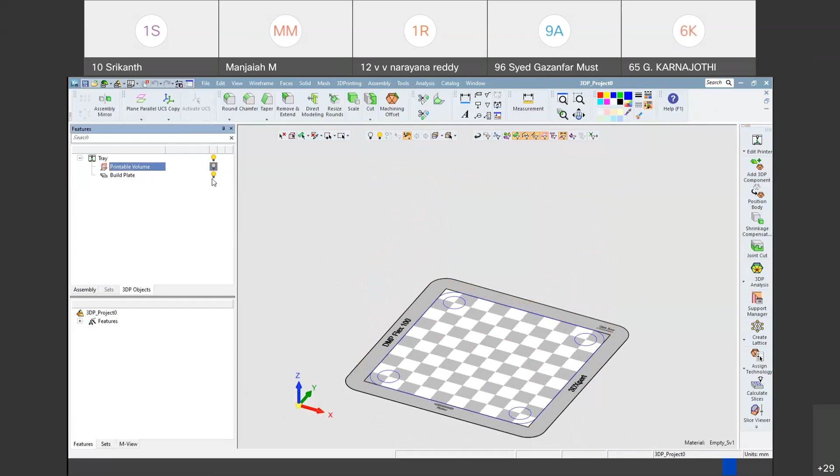DMP Flex 100—this is the machine name. So if I rotate here, this is the build volume: 100 by 100 by 80 mm. You can see the printable volume here. If I add the build plate, that blue colored contour region will disappear, and this becomes our complete area. So if I put a build plate here, this is the build plate, and this is the printable volume. DMP Flex 100 has that.

So first, let's look at edit printer—you can see edit printer is there.

So the edit printer option is there. The first step you need to do is the edit printer, and later we can add the 3D. These are some of the steps that indicate the step-by-step procedure, that is how they are arranged. So we can click on the edit printer. I will click on the edit printer. You can also add edit printer and material parameters.

I will click on the edit printer, and you can see here DMP and 3DXpert, which indicates the 3D systems software. It is actually not only for the DMP Flex 100.

Not only for the DMP Flex 100, these are the machines 3D Systems is having. So for all these systems, 3DXpert will support it. It depends on your system. Right now we are using DMP Flex 100, so we are using this one.

And this is the build plate for the DMP Flex 100. We'll fix that one.

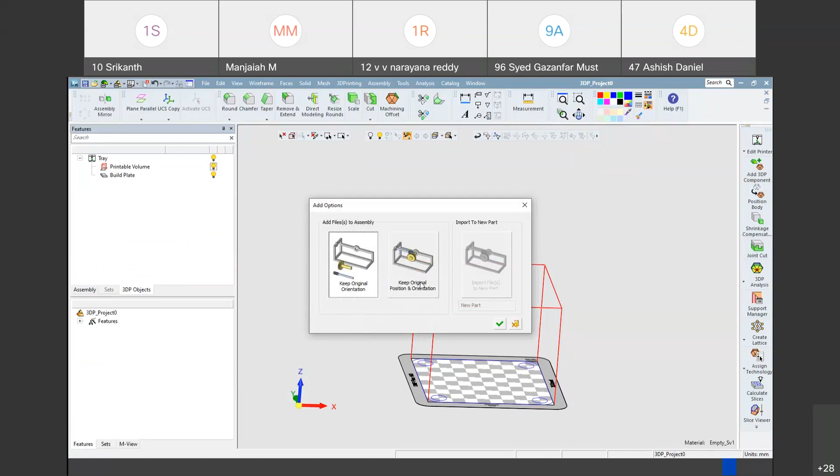It is asking keep orientation - original orientation or original position - and okay, I will keep this one default, so it will set into the default position, that is 0, 0, 0 position.

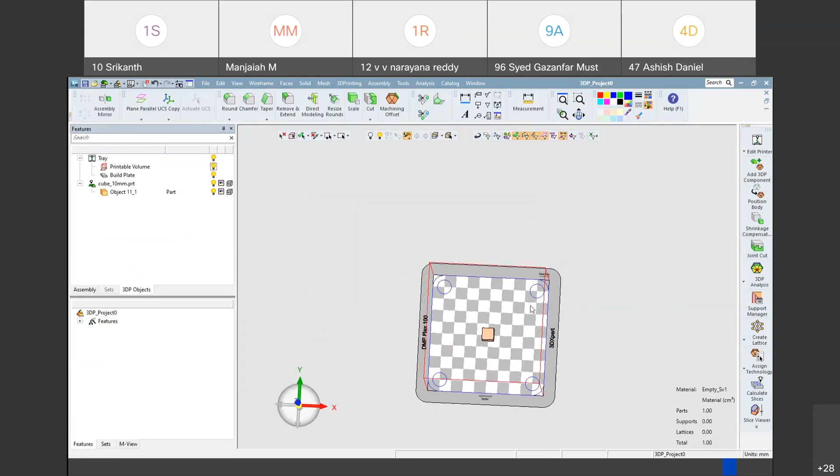So you can change your angle here like this, or otherwise you can set a control and move it. And always remember that it should be like this while importing the part - the roller should be here, and on the DMP Flex 100 this should be here.

So once we import the part, again what we need to do - if you feel this part is the smaller one, I can do the scaling.

After importing the part, you need to set the position. This is the default position, right? I don't want this position. So you can set the position, x-axis rotation, this thing, same as yesterday.

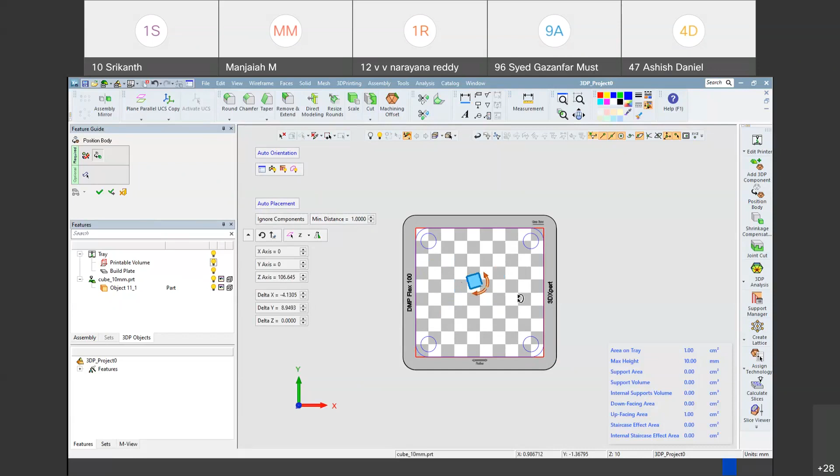I can drag my part by selecting this one and dragging it anywhere on the screen. Or I can set it - see these coordinate axes changing, right? Only the translation we are doing. Suppose if I'm doing like this, see the z-axis is changing.

Suppose this is the one - z-axis is changing, right? Suppose if I go, the x-axis is changing. If I go with this one, the y-axis is changing, right?

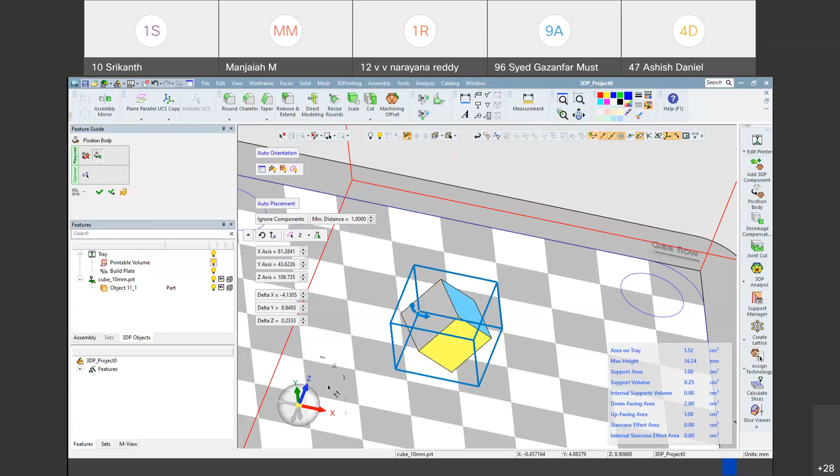So this is how you can set it. So if I feel this is the correct orientation, supports will come. So I will set it to 0, 0 default position, and I will set it to auto placement, auto orientation. It will come like this.

Anyway, these things I will set, I will tell you later. While importing the complex part, I will tell you what is the meaning of this one.

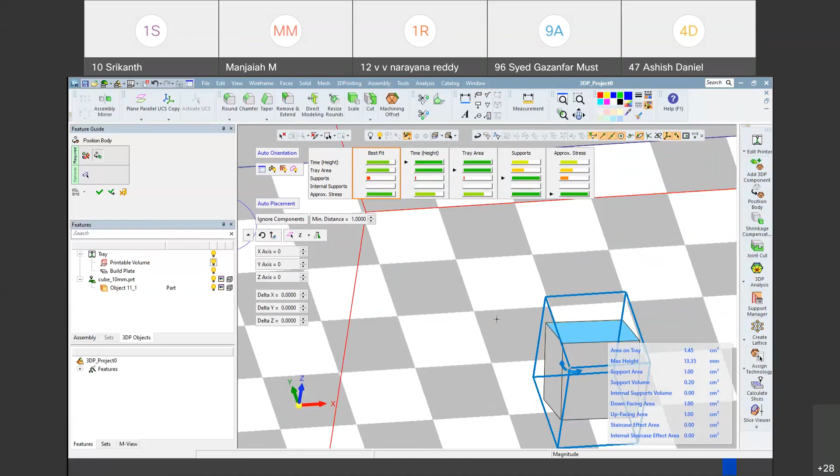Okay, so I will set it with the default position. If you are okay with that position, you can click OK.

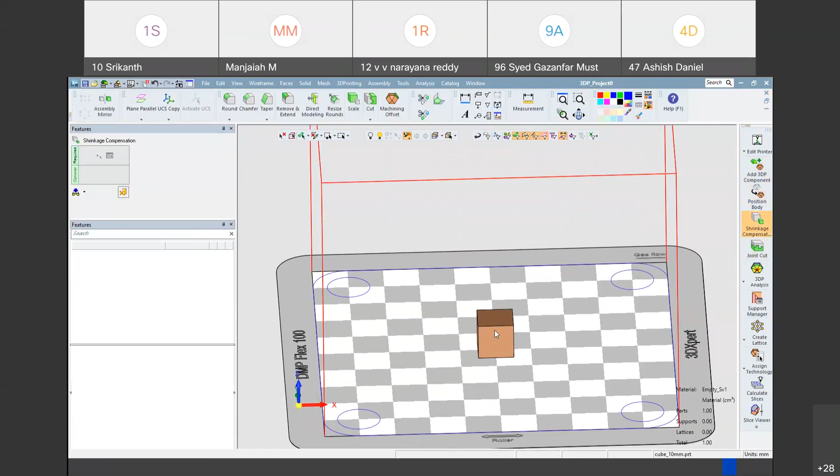So now the second step is the position after completing the add 3D printing component. That sets the position. You can go into the component if you wish. That's scaling. I will select this part, as we have only one part, so this is automatically selected. Same as non-uniform, uniform — I will go with uniform. Scaling rate, it's asking show as factor or scaling percentage, that is also there.

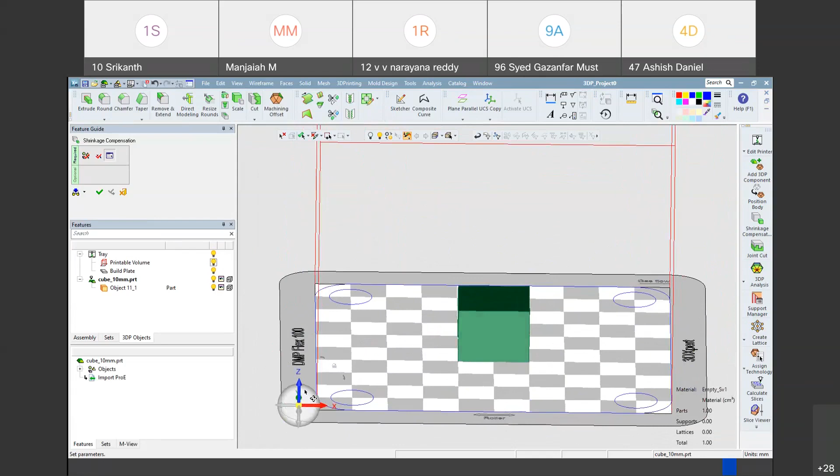So I will go with show as factor. Scaling rate I will set it to 2. See, that is increasing, right? But it is coming down — we need to set the position. So if I'm okay with that, I can click OK. Or otherwise, if you go with non-uniform, it asks X scaling factor, Y scaling factor. These things it will ask. So click OK, and I will set the position now.

By default it is already set. After clicking set position, it comes to the build plate, right?

So this is the simple cubic part. Why am I importing this part? Only to explore the options and some of the features which we have in this software — lattice, stretches, these things we will see later, and 3D printable check for this complex part we will see.

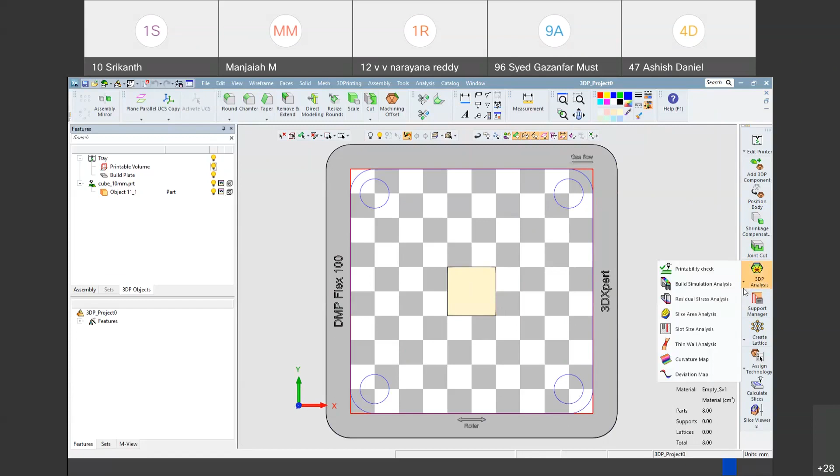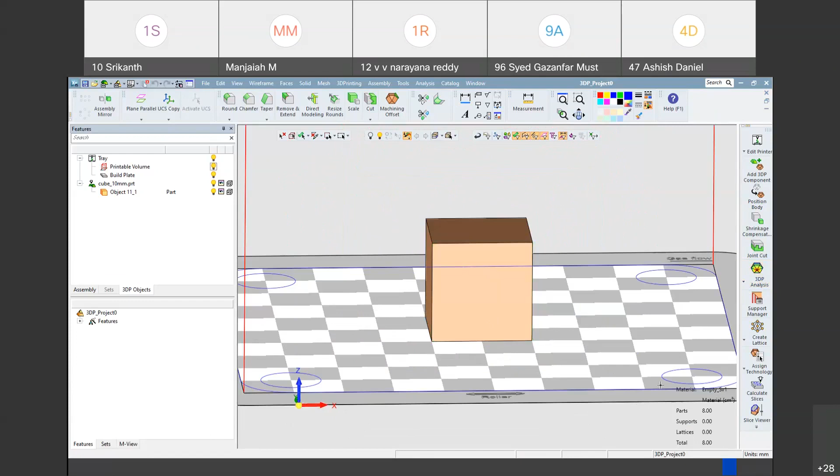So again, I need to go for position and delta Z. I will increase it by 5 mm just to show different supports. Check OK.

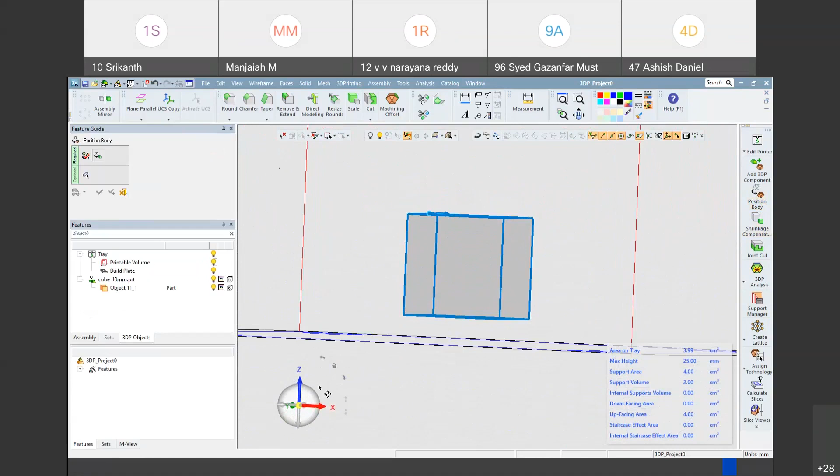And you can see also the position of the body. You can see some red regions are there, right? It indicates that there is a gap with respect to the build volume. So your supports will come — that is the meaning of that.

Or otherwise, you can see here also — your supports will come like this. And this is the approximate analysis. You can calculate here also.

Say it's about this, and I hide this layer. And you can see that overhang angle — that is the meaning of the overhang angle, which is the support. You can see this one. Overhang angle, I told you, right? We can set it here, or here also, overhang angle.

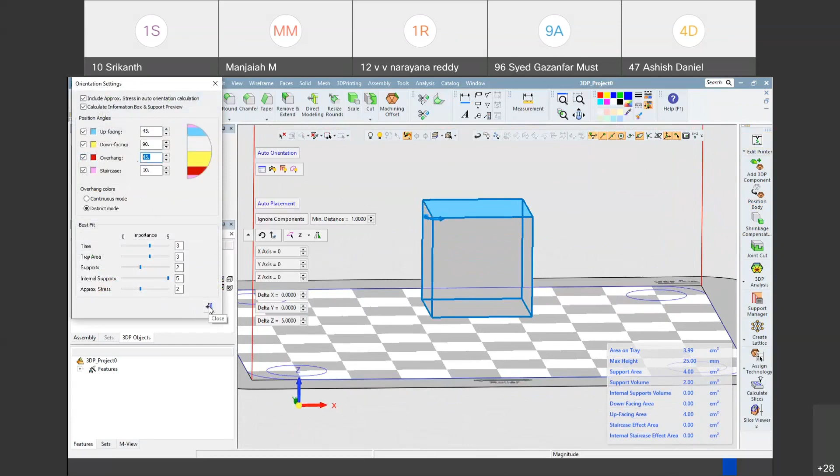Previously I set it to 45 degrees, or otherwise you can change it here to 30 degrees or something. If you don't want to go further, you can click OK and close it. So I will close this one.

Support manager — next is the support manager. We can add the support for that part. It is only one part we are having, so it will select default. Okay.

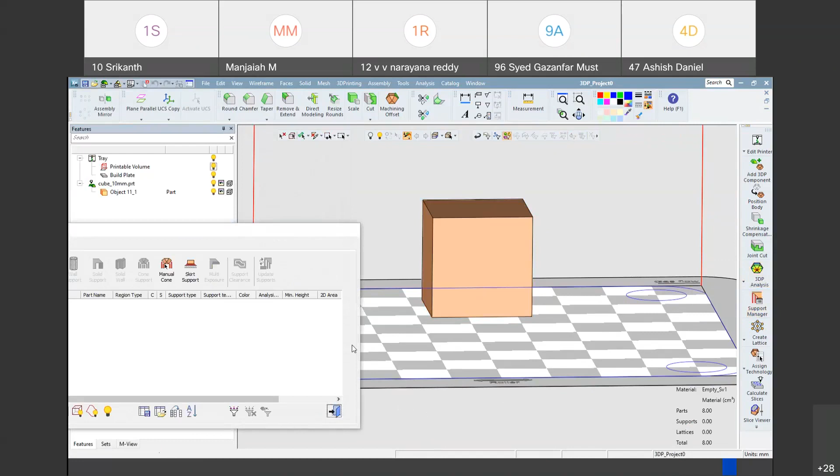Or otherwise, I told you about the copy array, right? If you want to do the copy array, how to do that — only one part. You can see here, copy parts. I will do 2D nesting. Minimum distance I will set to 5, and the target — my maximum I will remove it, and the target is only 2 parts I need.

Start calculation — see, this is the outcome. And one more thing, see this transparent color, which is the meaning of that — it is a copied part of the original one.

And one more thing, while doing this, the main thing you need to go with is position. You need to rotate this part, because I told you the roller is there, right? If you didn't rotate the part, what would happen?

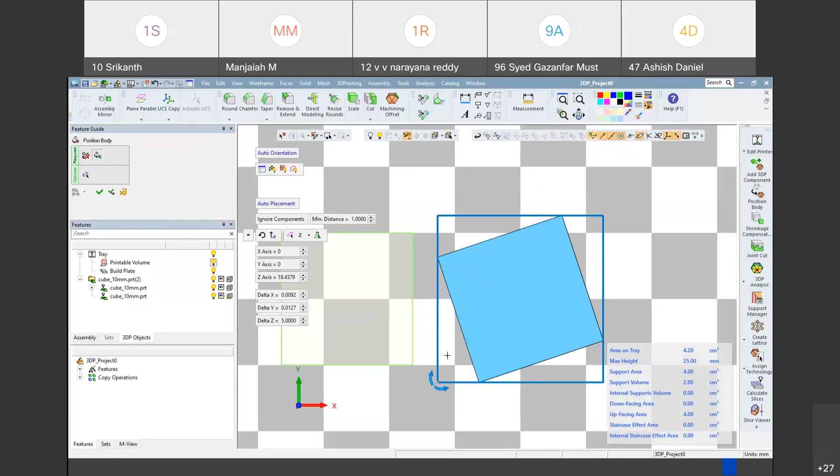Okay, I will set it here. What happens is the roller will come here, and the roller contact will be more here, right? So in one layer, the roller contact will be more — this much of roller contact is there. So the roller will get damage, will get stuck here. It means that will get damage — not exactly damage, but some error will occur. So we need to rotate this part, rotate it by 10 degrees or something.

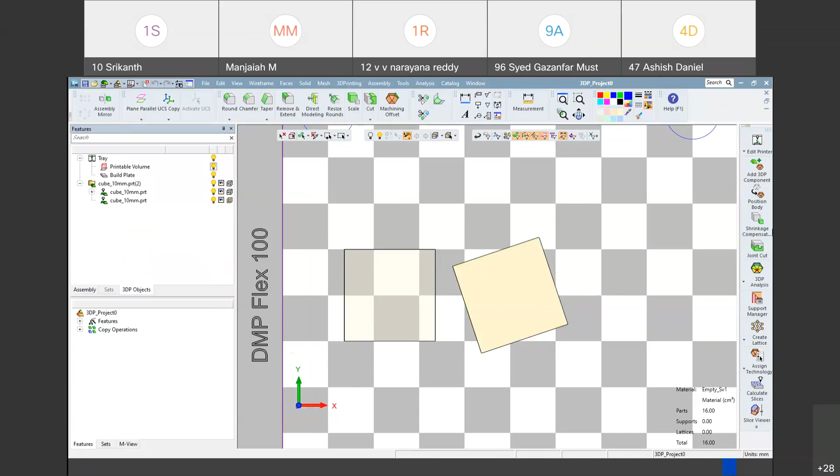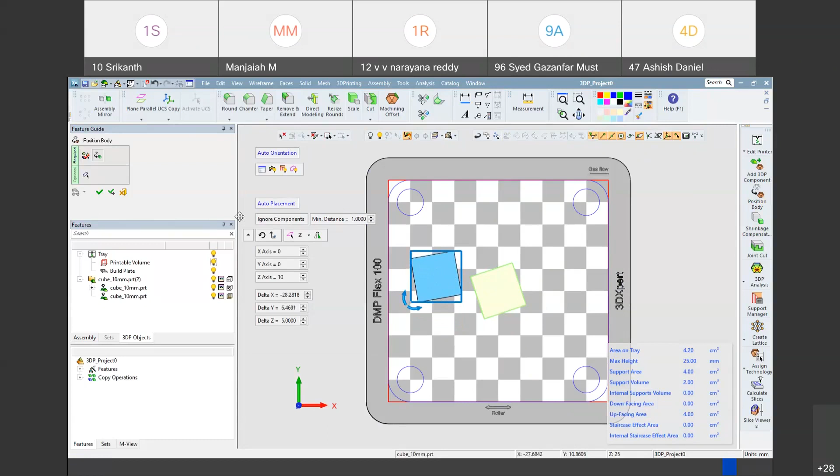So again, position of the body — this you can rotate by 10 degrees, and again place it like this. And one more thing, you can't place it straight away — we need to place it at some distance like this. Click OK. If you want to see this image, this section view, you can go with here.

Yeah, this is the hatching one. Total we are having 25 mm, and 0.5 indicates 0.5 mm, layer by layer, like this you can see.

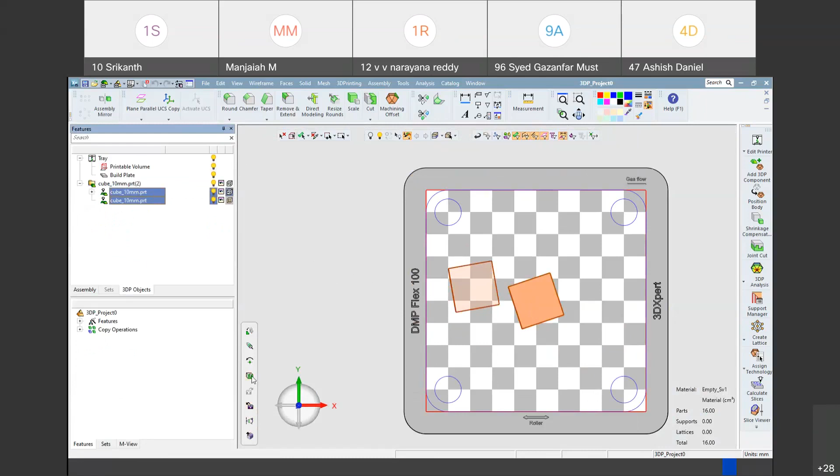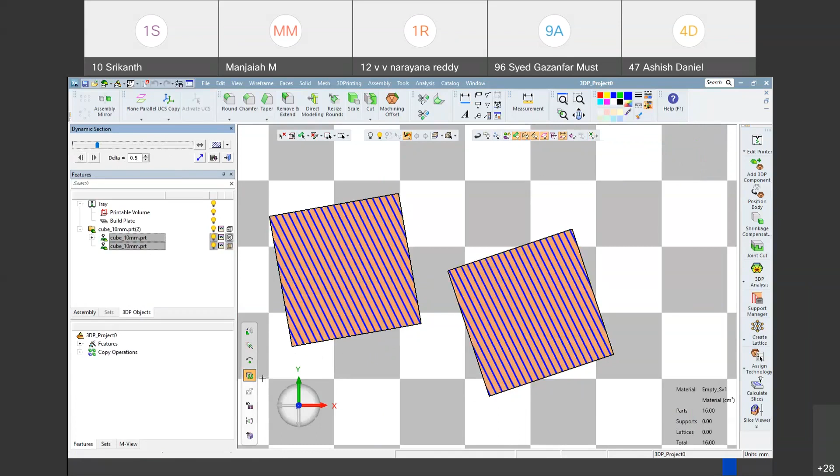So if you don't want this, okay, first I will generate the supports. Support manager - so now it is asking, it is not selecting defaulted. So I can select this one like this. And again, bar angle here also, we can set it here also. You can click to apply. And again, as it is a copied part of this one, so it will automatically come here. So the same, whatever the part is there, the same will come here also. If you don't want this part, you just delete this part - delete component.

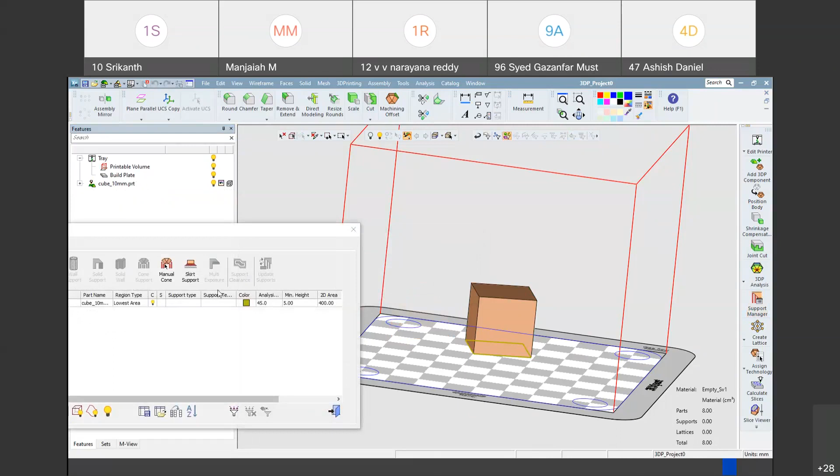So we can generate a support here. And this is the main thing, like what we have seen, that manual supports and all those things, right? And we have discussed in the sessions also, like point support, wall support, different supports are there - when can we use these supports, all those things. So just select here this one and it will open. Again, I'm telling you, support manager - if you didn't select anything, it won't open. So just select, place your cursor here and select that one. Which region you need to select? You need to add support - this region, and different supports are there.

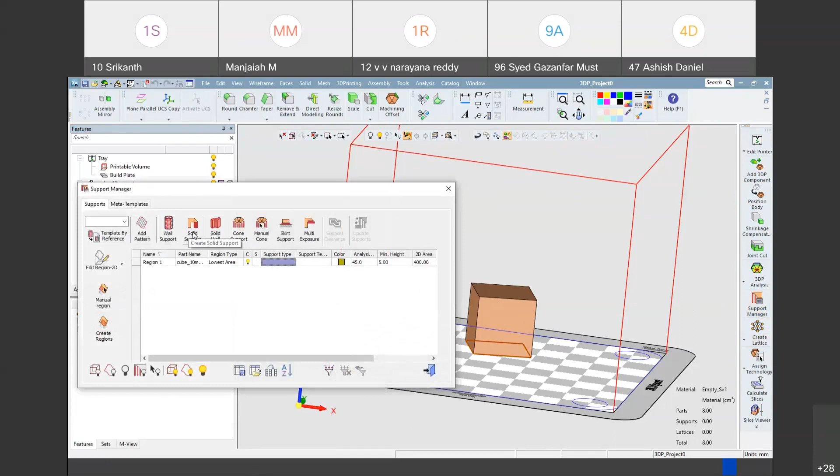First, I will go with the solid support, and I will see. See, this is the solid support we are having. If you want to add some skirt like support, you can add like this one, skirt. You can add a support like a skirt, and you can change the radius value - it depends on your requirement. But generally, if you are going with wire cut EDM, I am saying that you can place a distance of 1 mm or 0.5 mm is enough. If you are going with the bandsaw, you need to place a 3 mm or 5 mm should be required. So if I print this one, I can go with the bandsaw also, because I place a 5 mm distance.

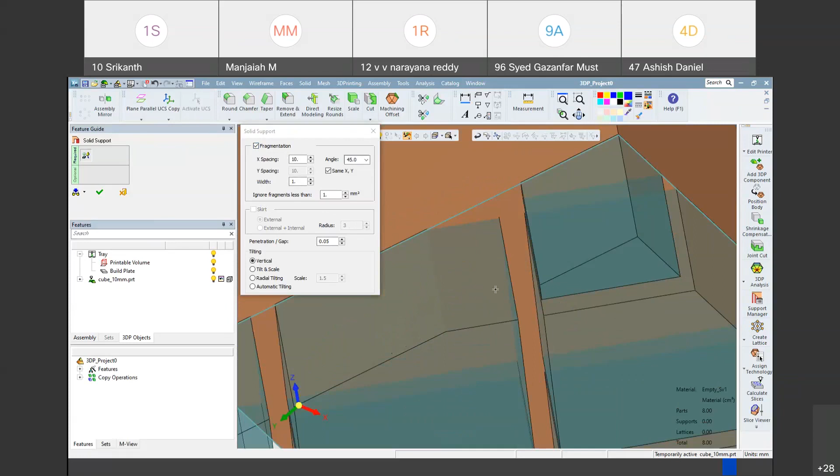If you don't want this one, you can put this one, and you can see. I click on the fragmentation, right? Fragmentation indicates easy removal of the supports, meaning it will break actually. See, that gap is there, right? So that we can remove it easily - we break it, because the stress concentration will get higher, there it will get break, right? Because of that, you can set the width also this way, like this. You don't want point like this. And the angle also you can set like 30, this one - 60, like that you can set.

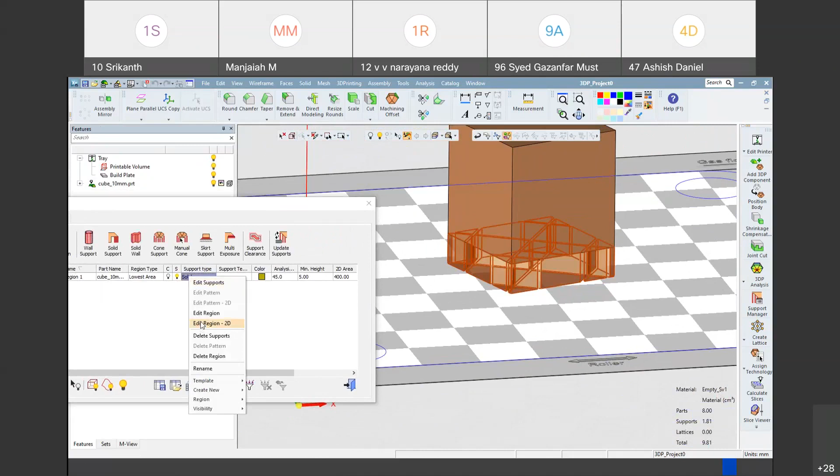Yeah, these things we will see later, and I will click OK - so this is how your support will look like. So I will delete the support and I will show you some more supports. Delete supports, click on the support type - we completed the solid support, and solid one we will see now. So this is the one.

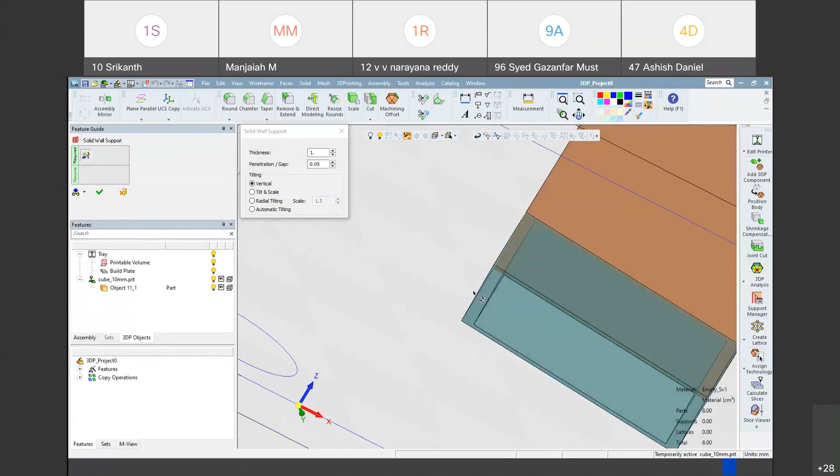See, solid support indicates that complete solid is there. As the name indicates, solid wall supports means some walls like a shell - yeah, you can see here, shell is coming, right? This is how it will come. But if you don't want this type of support, I need a like, okay, I will click OK. Some people might have thought that I need a support inside also, but that is not a solid support. I need outer region should be solid and inside region should be some other support.

See, that support region you need to first identify. We are having a support region of a simple cube, simple rectangle, so your support will come as a rectangle. So we need to make a region - we can either go with the edit region or some other region. How to do that, first check this one and you can see.

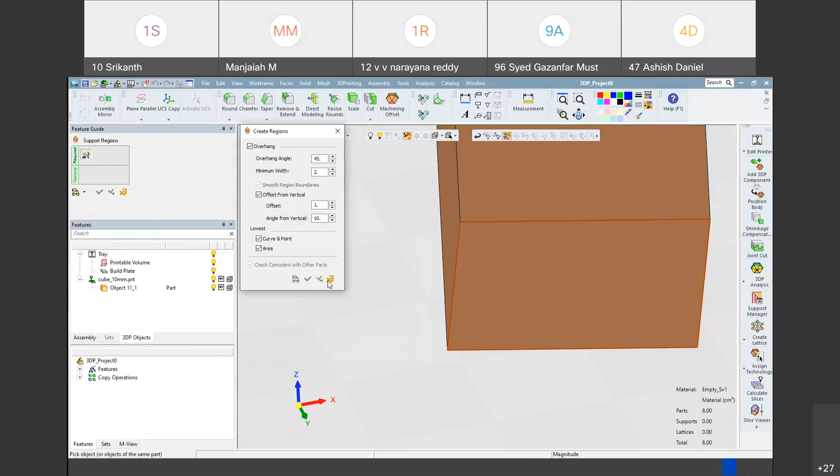Create regions is there - we don't have a region, right? So I can say create regions. Sorry, this is a region - the region we have selected, but we need to edit this region.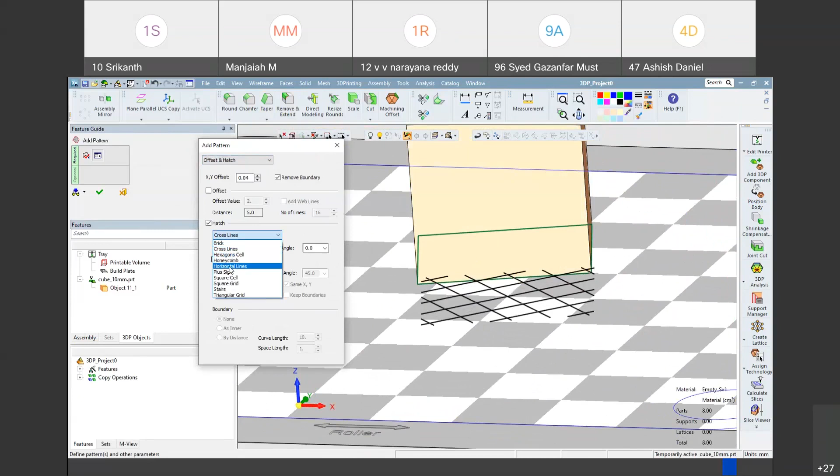Add pattern for that - see, the region is selected, right? So if I get a support, my support will look like this. Suppose this is offset and hatch pattern in cross lines. You don't want that one. In that offset and hatch pattern, also square grid is there, cross lines is there, honeycomb is there - like we have seen the hexagon, right? Hexagon infill, like that.

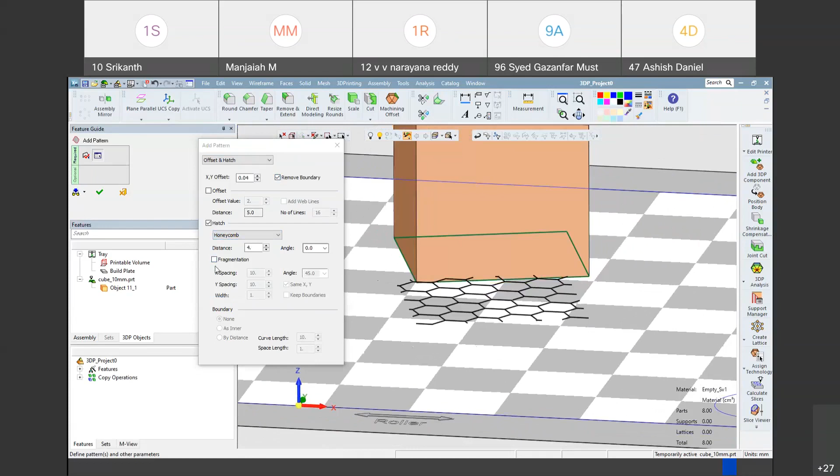And if you want a boundary, you can click the boundary here. If you don't want, you can uncheck the boundary. So I will go with honeycomb and I will show you. You can check the fragmentation so that it will break - the region will get broken like this. If you don't want, you can click OK.

So this is the region we are getting. Now I will add supports - wall support and everything. You will see solid wall indicates this one only. See, this is how you can get the solid, but I don't want this type of support. I need an outer wall, and this is the reason we have created it, and I will go to wall supports.

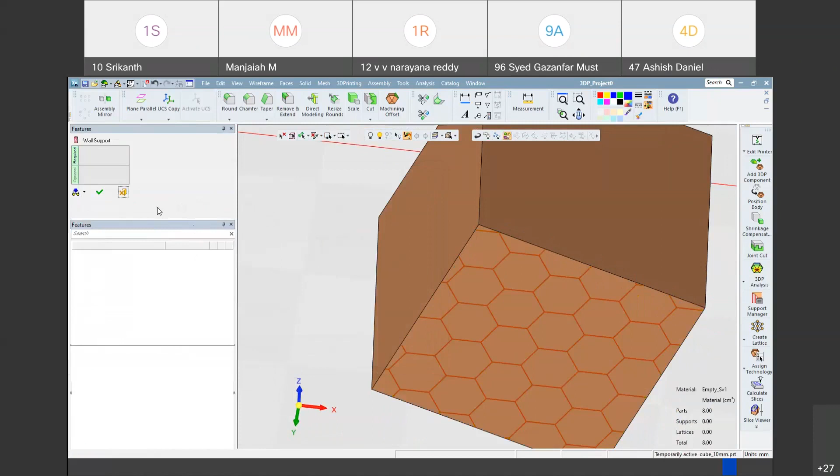So this is the one we are getting, but I told you right, I need some external boundary. So I will go with... slice as solid wall.

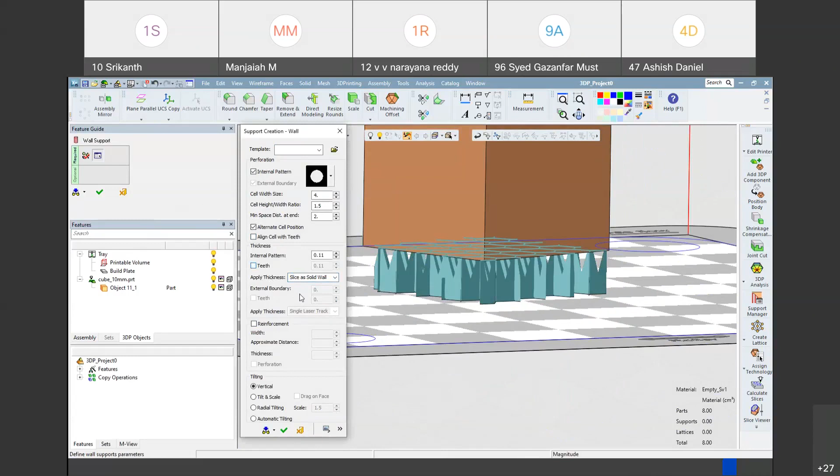At that time we removed the boundary so we can edit the region. How to edit the region, also we can see - I select this, select the support type, and right click on this and you can see edit pattern. Edit pattern gets the support pattern. Edit region 2D - this one, not this one. 2D indicates you can add manually. You can click on edit region.

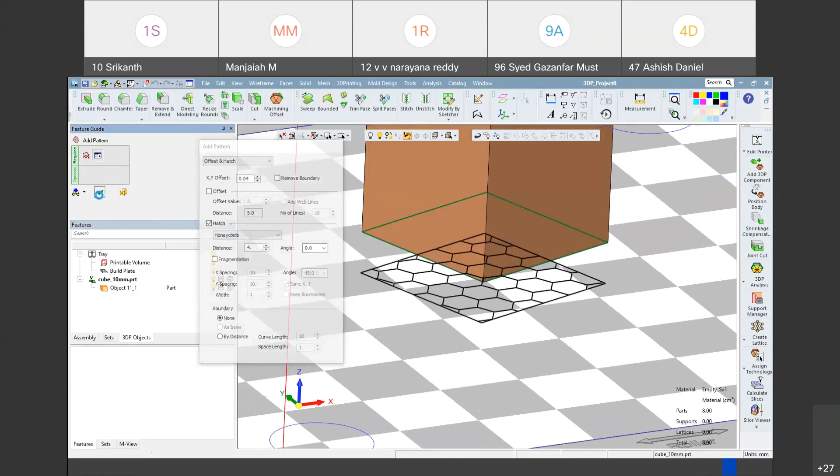Edit pattern, okay. So I will click this - remove, instead of removing the boundary I want a boundary, I will fix a boundary. Click OK, so now boundary is there. So I will go with wall supports - solid slicer, slice as solid wall, so single laser track and this thing.

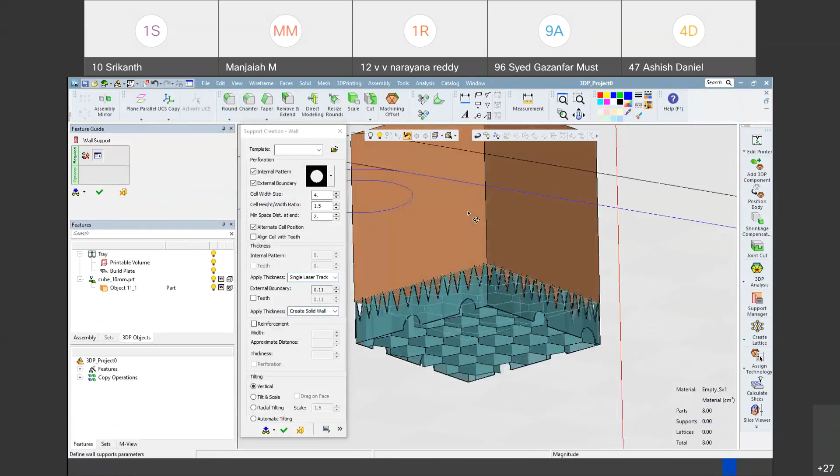See, now we are getting it, right? Apply thickness as create solid wall, so inside wall is there. If you don't have this region, you can't able to get it. So I will set my thickness here, like 0.1 mm or 0.5 mm - this one, see.

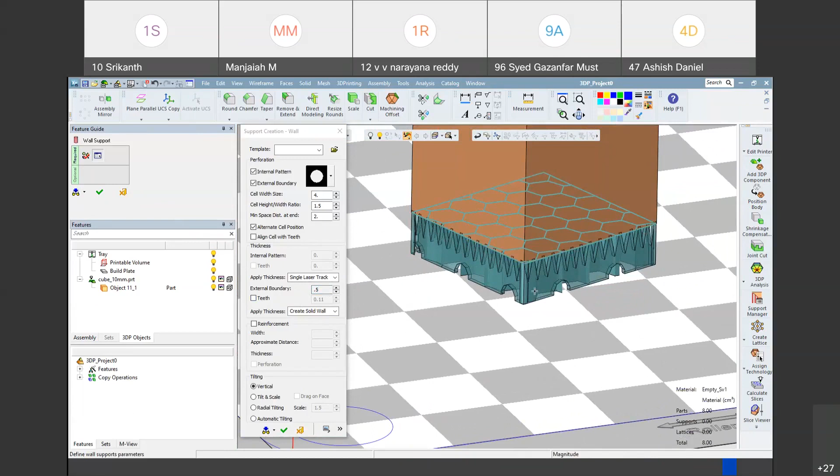These type of supports I need, suppose. And remember, for this you don't need to do the wire cut and all those things. You just directly take out the build plate from the machine and you can remove it manually. Post processing tools are there - with the tools you can remove it also. Like for FDM, polymer, metal also post processing tools are there - with the tools you can remove it.

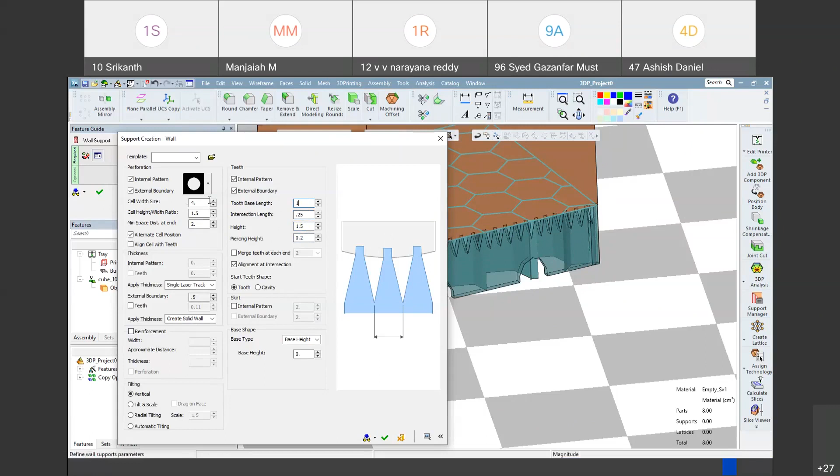And this, if you want to change that one, you can reduce here. See, circles are coming right. See, now you can see these circles - the circle indicates the pattern actually. See, we are having the internal pattern should be texture circle, right?

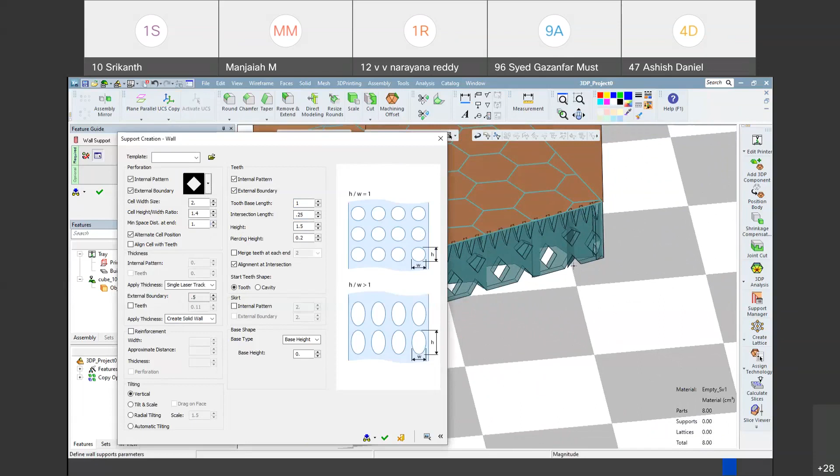Suppose it - so texture we can see now. This is how you can change the texture and all those things. This also you can explore - these many parts as well. I will go with circle so that we can easily remove it. So click OK - if you don't know the meaning of this one, you can check the image also like that.

So click OK, see the color is changing, right? Which indicates that these are the wall supports, and this is - sorry, this is the solid wall support, and this is the texture. I mean, depending on the texture, we are getting the pattern internal support.

So that is how you can place different types of supports. We also have lattice supports, but it depends on your application. For me, this is okay, but if it is a point type, like some regions where we need to apply a pointed support, for that you can go with the lattice supports.

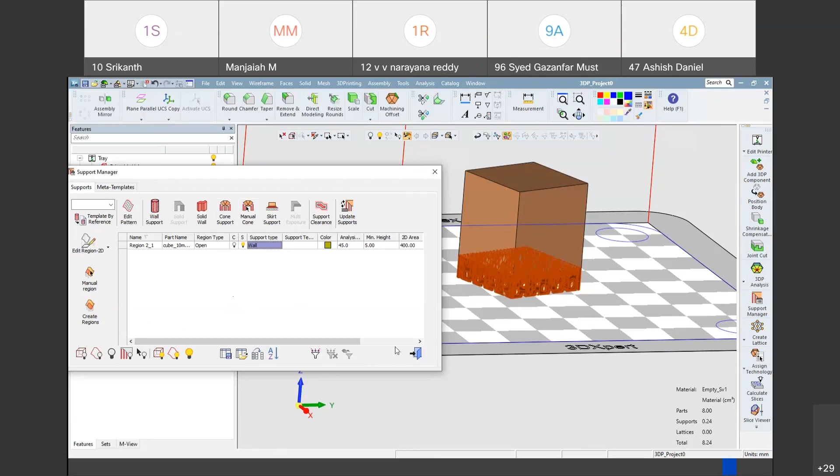Suppose I will go here. After completing everything, create lattice to indicate that lattice. I mean, if you want to print a cube or lattice, that's the meaning of it. So I will show you - create a lattice, and I will select the part. But one more thing, you should create a lattice before adding the supports only.

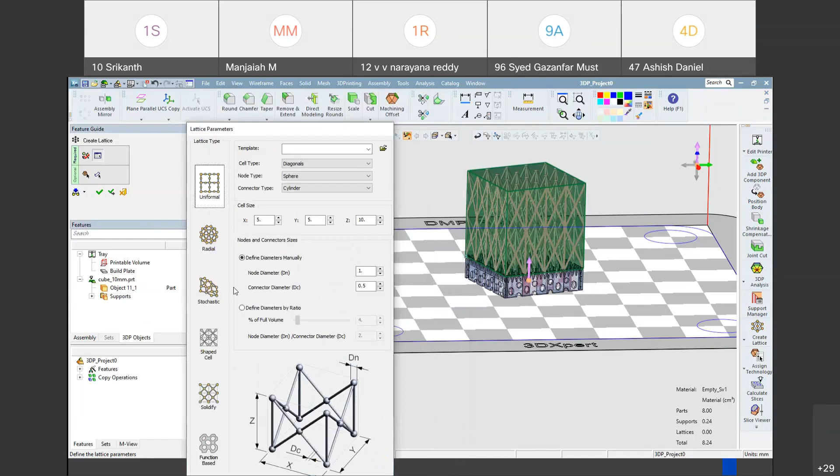I will show you, see, different types of lattices are there, and these are some of the types. Uniform lattice, radial lattice are there, and you can see the changes here. And the connectors are there - this is a cylinder connector, right? Connector type is cylinder, but if you want a box, you can put a box or rhombic.

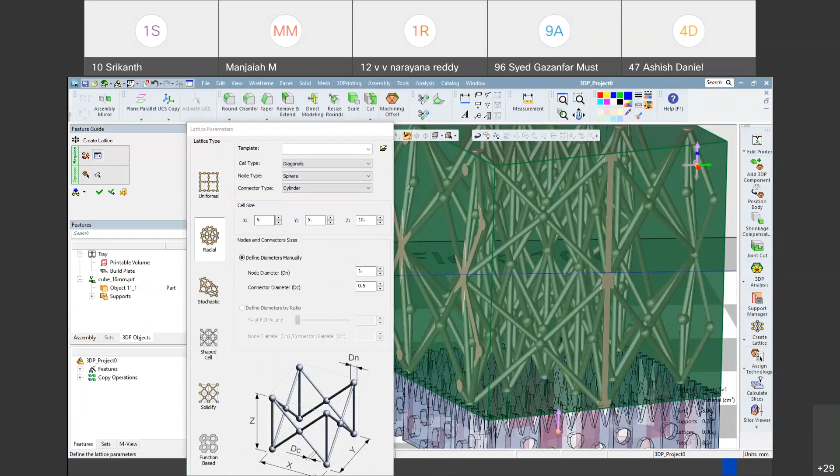Cylinder, and these are the node types - node type is cylinder, sphere, right here. If you want to change the node type, you can change it here. Tetrahedron - these are some of the most options available in the 3D.

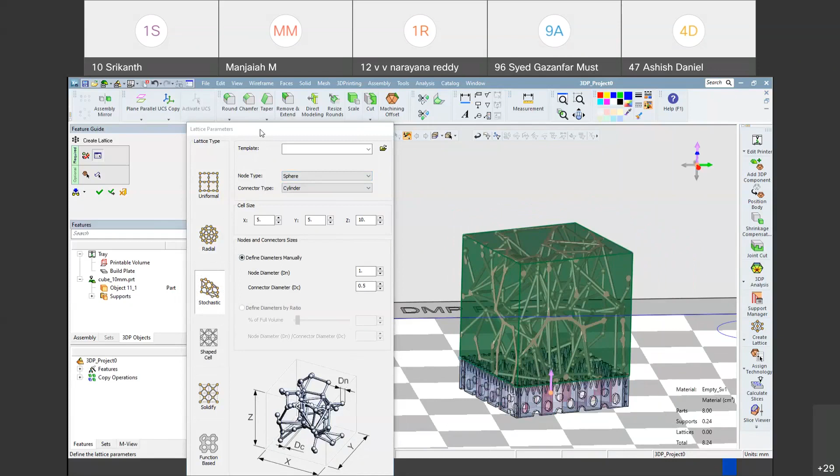So that is how I just wanted to say this thing. Cell type is a face, and which type of lattice - face and cubic or diagonals, diamond, these things. Or if you want stochastic, you can go with here. Or if you want Solidify basis, you can go like this, and click OK. If you want to change anything, it will change actually.

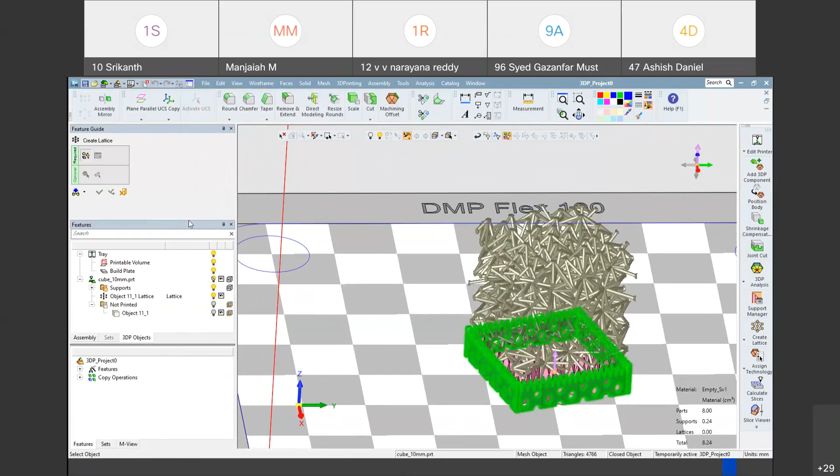These parameters also you can get - node diameter and all those things. Click OK, see, this is how it will look. But here the support is not a correct one, so we need to delete the support. How to delete the support - select this one, or otherwise you can hide it. Hide the support like this for the time being.

And if you want to delete this lattice, you directly delete this one. Again you will get the part. So that is how you can set a lattice. I mean, again I will go with the supports. So that is how you can set a lattice here itself also.

After completing all those things, we need to go with assign technology, or otherwise you can straight away go with calculate slices. There you can assign the technology also. So I will go with calculate slices. It's asking all technologies must have a build style assigned to them, this one, so I will assign here.

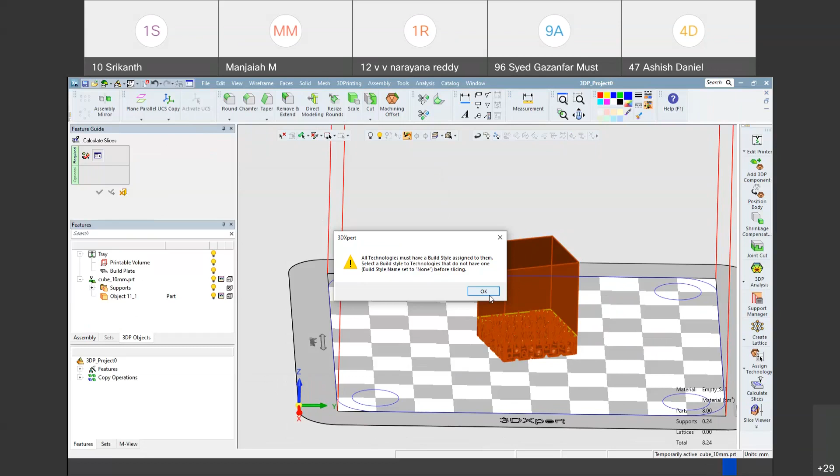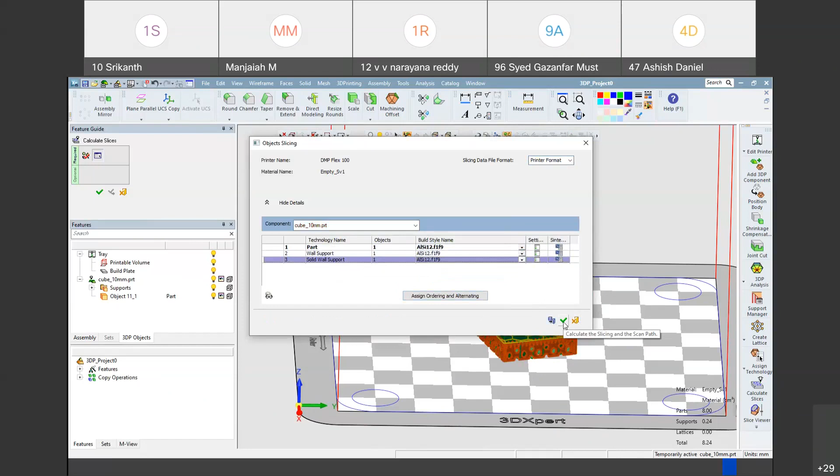See, we are having the wall support and solid wall support - these things we need to assign. As we are using aluminum, so we are having this one - AlSi12. For the same material I will use the same material, and again click OK. First we need to do the slicing for the default one.

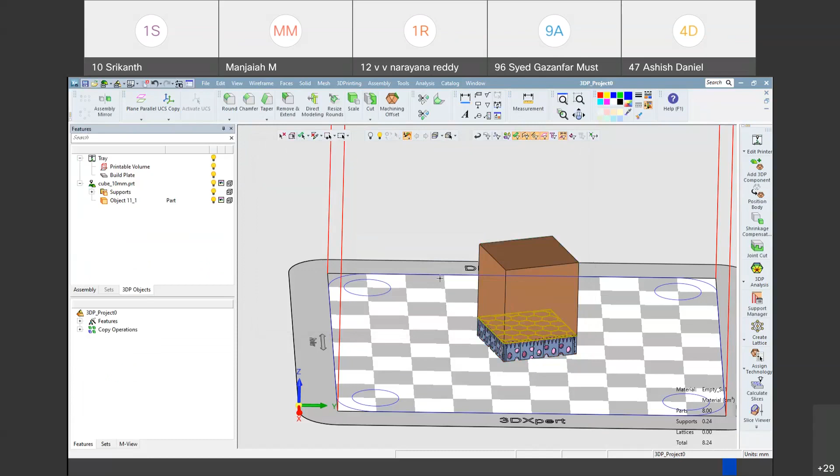It will take the slicing. You can see that image and all those things, and it indicates the slicing, and one roller is moving. The same mechanism will apply here also. And if you want to see the slice here, you can see here.

But I told you, right, we need to edit the parameters also - I didn't mention that one. Now we will see how to edit the parameters also. Exit from this here. Nice, here.

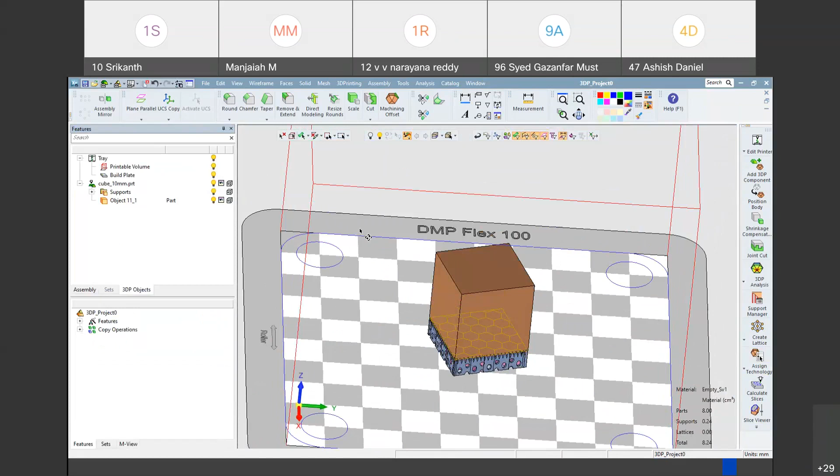You can see here one thing is there - you can also get the print estimation, how much time it will take to print for these parameters and this material, for the build style. It is showing 1 hour 22 minutes. Volume based you can't get it, you can get the scan path based one. 1 hour 22 minutes will print, exactly that much time only. And supports will take 3 minutes 2 seconds.

In between layers indicates that the roller is moving, right? That is the meaning of the in between layers. It is also calculated how much time that roller will move to and fro. So the total time will be 3 hours 16 minutes for this part it will take.

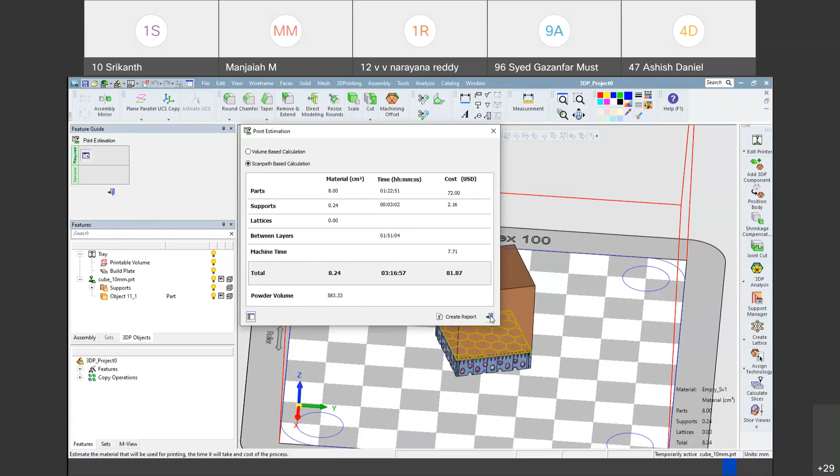And you can generate a create a report also. So I will go with the editing parameter. I will click this scan path manager, create and manage scan paths. So this is the default one.

So I will calculate, I'll go with the recalculate slices, and you can see printer name and the material name, recalculate slices. And for the supports, I don't want any build style and I don't want to change the parameters. The default one is okay because we are removing the supports, right? So my main focus is on the part.

So I will go with the build style settings for the part settings. Yeah, you can see settings, and this is the sintering setting. You see here.

Sintering factors, we are moving in the settings only, build style settings. So it is showing this tab is there. And here general parameters, contour parameters, hatching parameters, laser parameters, layering parameters are there. This layering parameters you can set it, but there is a default one only.

Like how much oxygen set point we indicate, that we are sending an inert gas, right? Inert gas set point, that is 1000 ppm. Default one is 1000 ppm, and the initial descent means that initially while doing manually, powder will rise actually. That is the meaning of the initial descent.

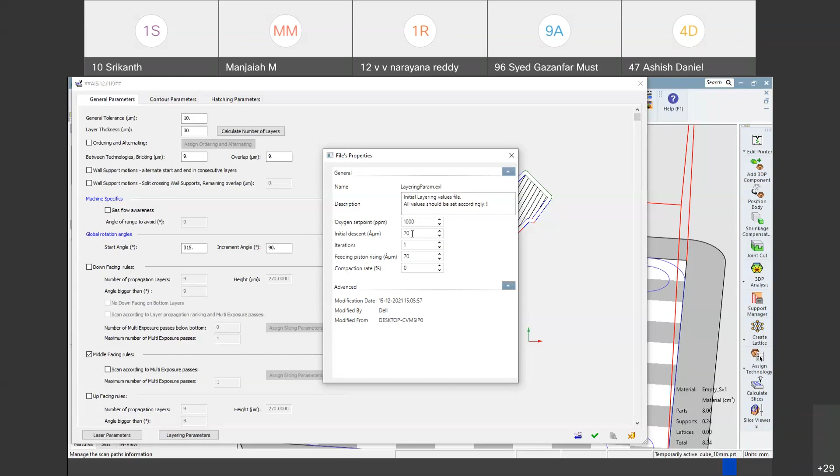Anyway, we can see the animation also, how the laser and carriage will move. And this is the iteration, only one iteration I need to do. One iteration means only one time that 70 micrometers will come. So if you click 2 times, 70 micrometers will come 2 times. That is the meaning of that.

That is the layering parameters, and the layer parameters you can see here, laser parameters, and layer thickness is 30. Yeah, you can see general parameters, general tolerance is there, and the layer thickness. Mainly focus on the layer thickness. So you can calculate the number of layers here also. So 833 layers you will get with this layer thickness.

Suppose if you put this one, yeah, number of layers will be 1250. By default, I will go with the 30 micrometer. I mean 10 micrometer to 100 micrometer you can go. We are following with the 30 micrometers.

And again laser parameters is also there. Once we complete these things, laser parameter 30 micrometer, you can set it here mid. Laser power 100% indicates that 90 watt actually, and we are setting here in terms of percentage only because DMP Flex 100 is having some type of laser power, DMP Flex 350 having some type of laser power, right?

That's why they set it to percentage manner. So 100% indicates the 90 watt. So you can calculate that then, for to do the 70 watt, how much percentage I need to add? Like 78% like that. And the mark speed indicates the scanning speed. So if you want to change to 100% means 90 watt. If you want to change it to 90% of 90 watt, 81 watt will come like that. So I will go with 100%.

And the mark speed, you can change scanning speed 600, 700, 800, or 1000 also you can go like this. The defocusing, we are not changing anything. And click apply. If you are okay with this laser parameter, you can just click apply and exit.

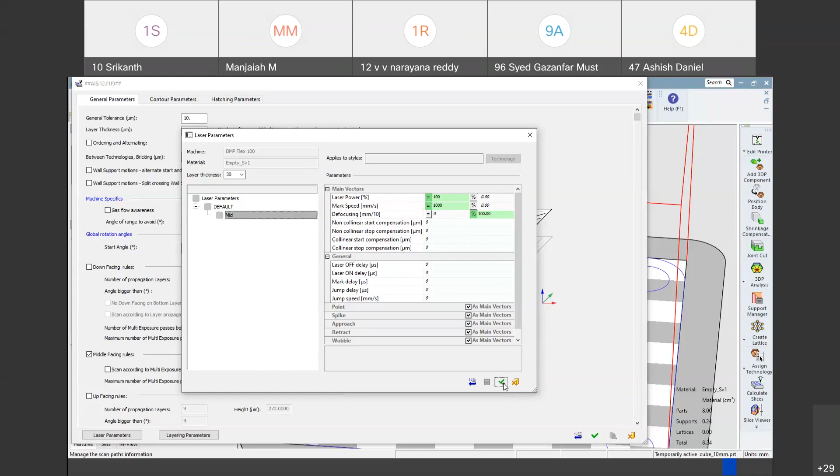So once we completed this one, now we need to look onto the laser parameters completed and this layer thickness we have seen. And contour parameters, these contour regions, we are not editing this one. If you want to wish, you can check this one and edit also. That is also possible, but in general, we are not touching that one.

Strips will look like this, and rectangular cells will look like this. So you can set it, the cell strip height is 10,000 micrometer, and cell width is 9. Cell width indicates this one.

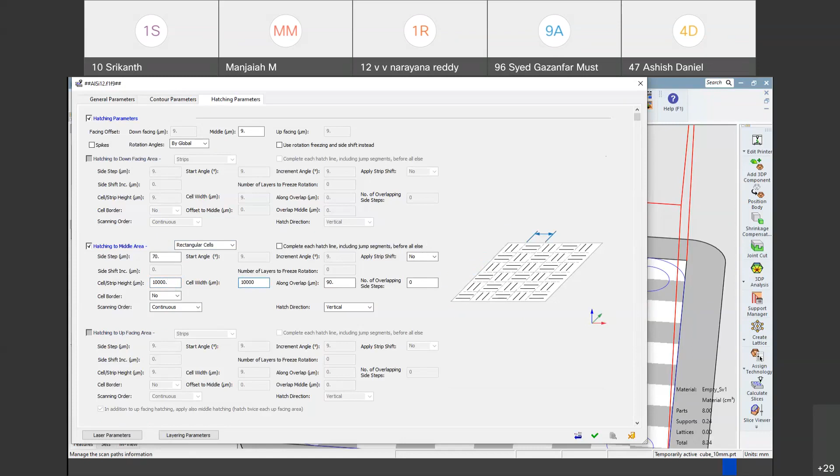So if it is 10,000, it should be like 5,000, 10,000, or 15,000 like that. It is not like a 9 micrometer, so that you can't print, the laser won't be able to print that out.

The along overlap indicates that this is the reason some regions may get overlap, right? That is the reason 90 micrometers will overlap will occur. If you want, you can reduce it also.

And rectangular cells, this is like, yeah. You can see rectangular cells will print vertically. If you want horizontal, you can print horizontal also like this. Or alternated indicates like this.

Like 10,000 I set it right here, right? Suppose if I go with 5,000, and here also 5,000. So for a 10 mm cube, two regions will occur, 5,000 and 5,000, right? This 5 mm, 5 mm. So a 5 mm cube will occur in a 5 mm place, so two regions will occur, right? Total four regions. In that you can see here alternated.

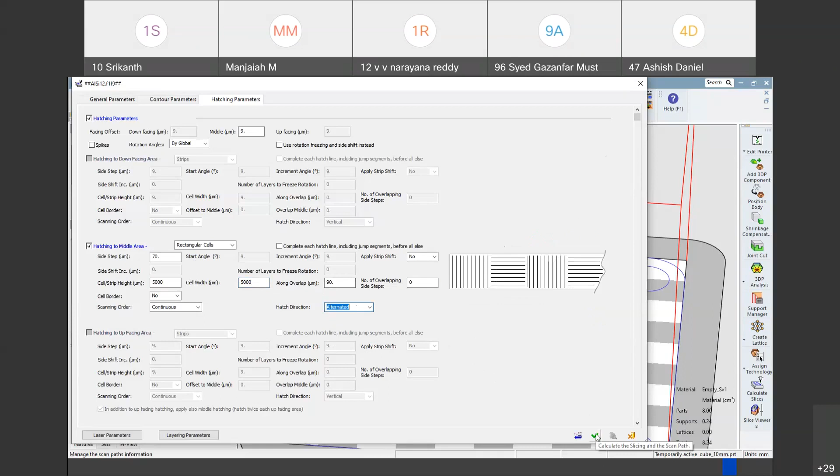So if I go with this one, 5,000, 5,000, you can see clearly. If you are okay, you can click OK, or if you want to change some other parameters like strips, hexagon, these things you can change. Click OK.

Save and close. Apply the build style. Click OK and OK, so that it will scan it again. It will calculate the scan path and all those things, which takes time for slicing, like what we have seen yesterday.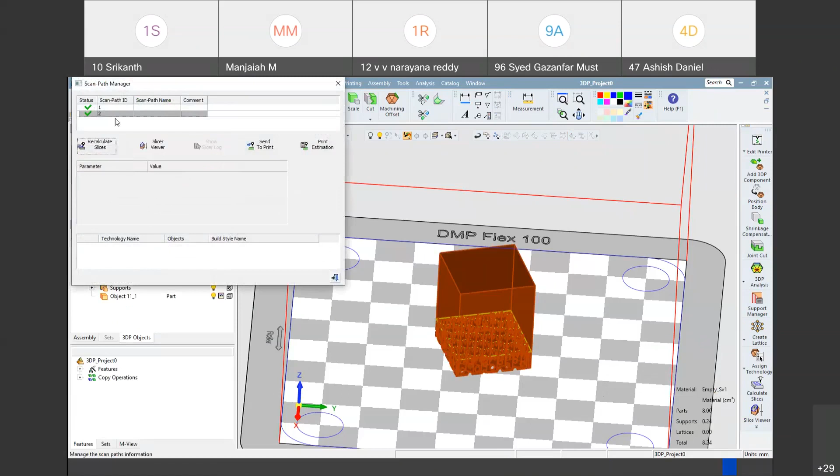And you can see the slice view here also, or if you exit, you can see the slice view here also. I will go with the scan path method and I will show you both slice views, 1 and 2. One slice view will look like this.

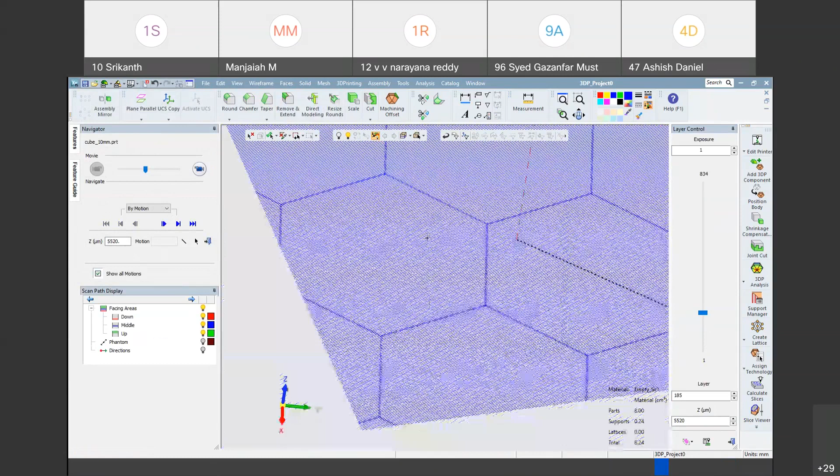These are the supports, supports will come the same. See, from here your part will start. See, this is hexagon, and you can see inside some hatchings are there, right? This is a 10,000 micrometer hexagon. Inside some hatching regions are there. This is the overlap regions.

And if you want, for the second slice, here you will see. For support, it is not changing, that's why it is not changing. So you can see here, I told you alternated, right? Here it is vertical, here it is horizontal.

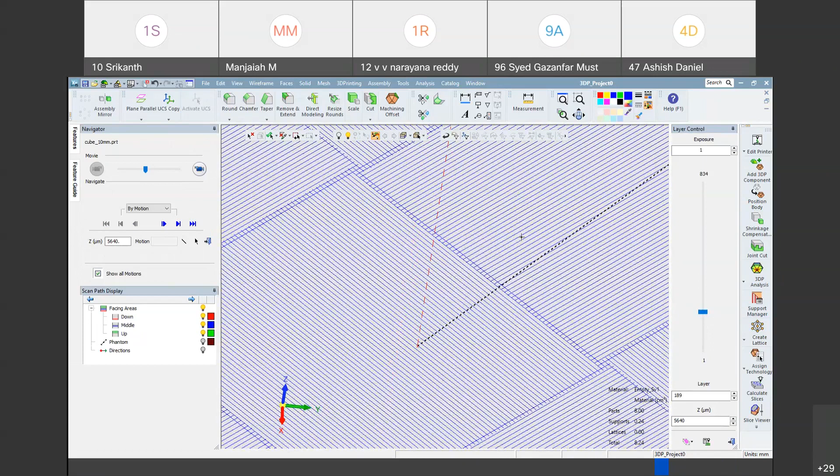The same thing, like a chessboard. Here it is vertical, and if it is vertical, the opposite side will be horizontal. Vertical, opposite side horizontal, opposite side horizontal. And in the bottom also, vertical, opposite side will be horizontal. Like a chessboard, this is vertical and this is horizontal. That's why it is called a chessboard pattern also.

Like that it is there, and we will move on to the machine later. I will show you the mandible, and how to import the mandible and all those things. We'll move on to the printing one.

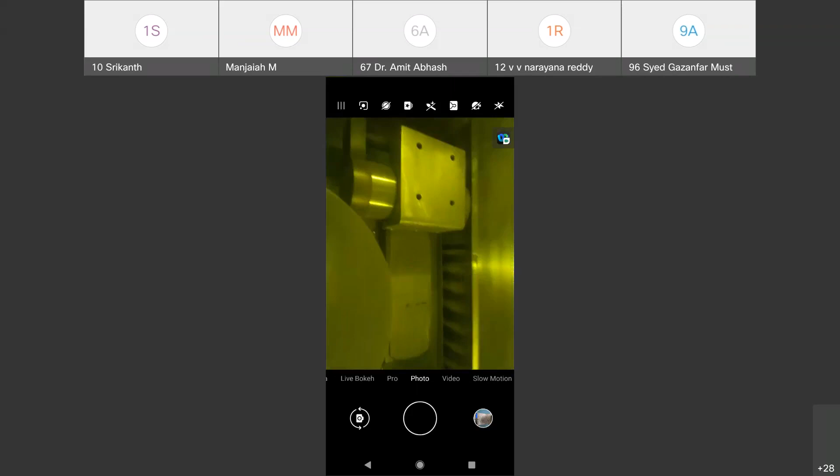Oh yeah, okay. With live streaming, what about my voice? Is it here? Still we are getting some blur. What is this? I think might be able to hear my voice now. Is it okay? No, actually there is a lot of disturbance and noise. Okay, we have flipped over the phone. See.

So till now we have seen the software. Now we will see the metal thing. This is the DMP Flex 100 metal machine.

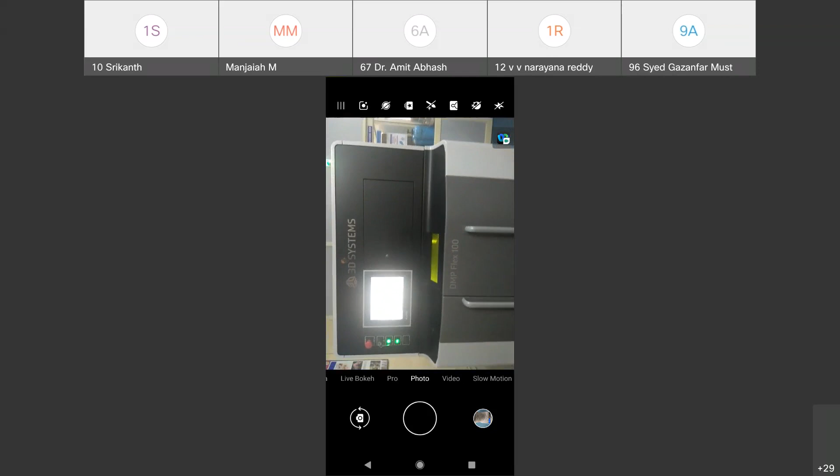So the brighter one is the display, operating from here, and now we are able to see the screen in a straight way. Something like it is in some vertical direction, not horizontal. I think there is a problem in sharing. Yeah, the picture mode is in a straight, I mean vertical position. Is it fine? Still it is the same, but you can carry on, no problem.

So this is the preparation mode. Okay, so you can see these tabs.

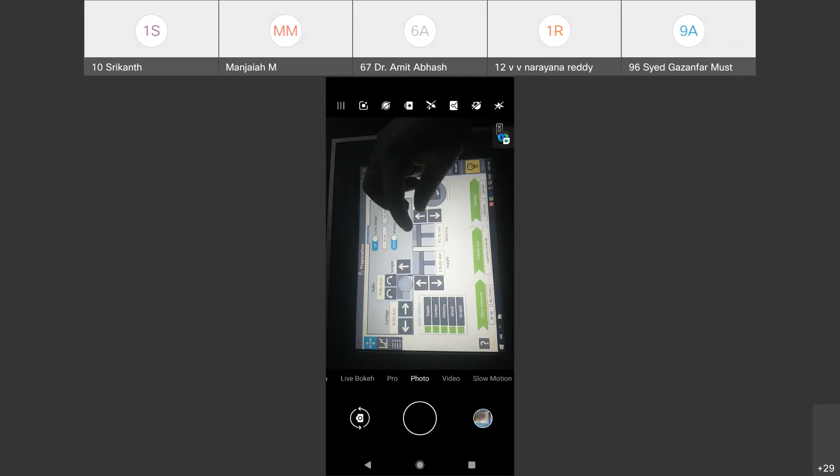What are these? This is the powder bed, as we know how it is working. This is the bed or roller which moves the material. This one is the supply piston, which is pushing up, pushing the powder to the centering piston, so that piston will place it. The roller will move to right and then left. So this shows the dimensions, and this is about the chamber oxygen point. To get a good component, for demonstration, we gave aluminum small cubes. We also have this in titanium and cobalt.

Rotate the phone, Anna. Rotate the phone.

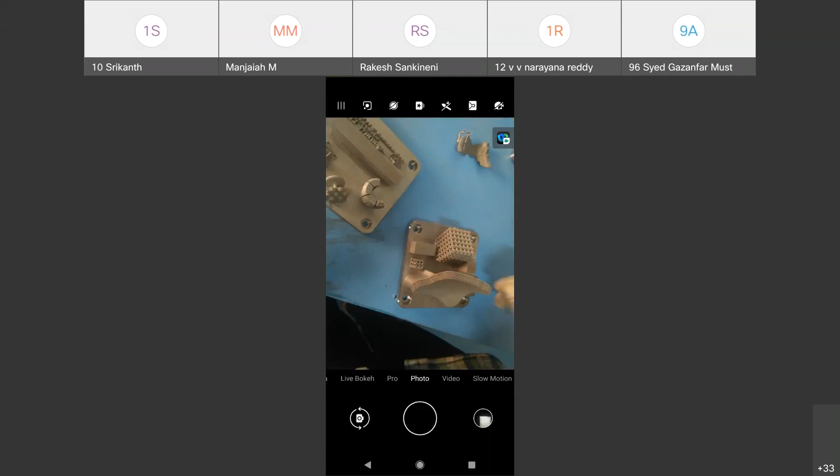You know how it was printed, and these are the basic files we have given. This is a cranium plate actually. You see the internal cellular structures here, and these are the cellular structures which are other things. Here also it's a basic dimension plate, and here you see how this lattice structure is printed well.

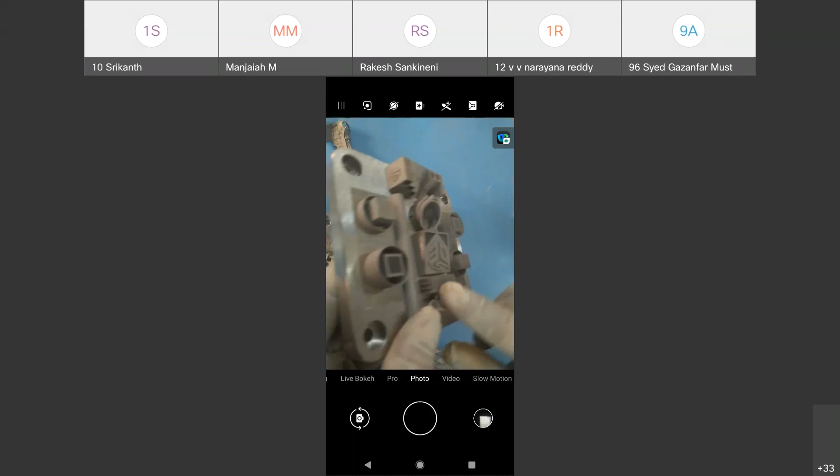This one also is a dimensioning plate actually. And here you can see the steps in the medical implant.

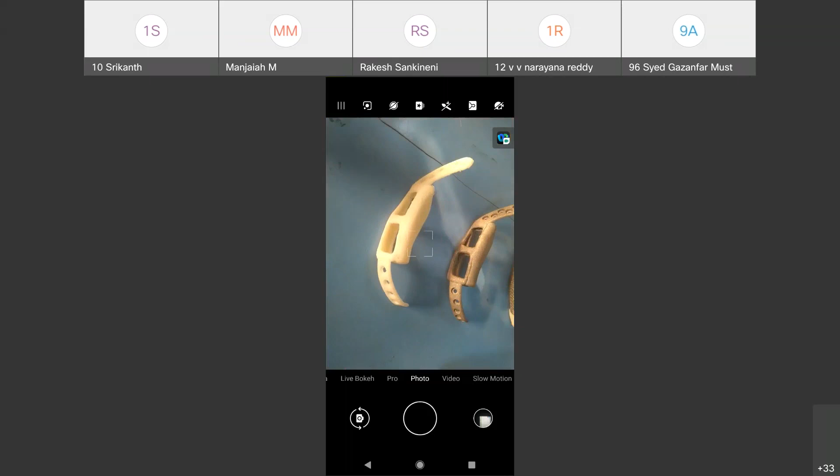First we will go for the FDM model. Later we will print this, this is a titanium implant actually. So we'll go for the solid one, and later we applied the lattice.

Okay, these are the things which we usually print in the metal, and these are the post-processing tools. Apart from these post-processing tools, I should tell you about this oven. See, this oven and the sieving chamber, these two things will help you reuse the powder. The powder is very costly here.